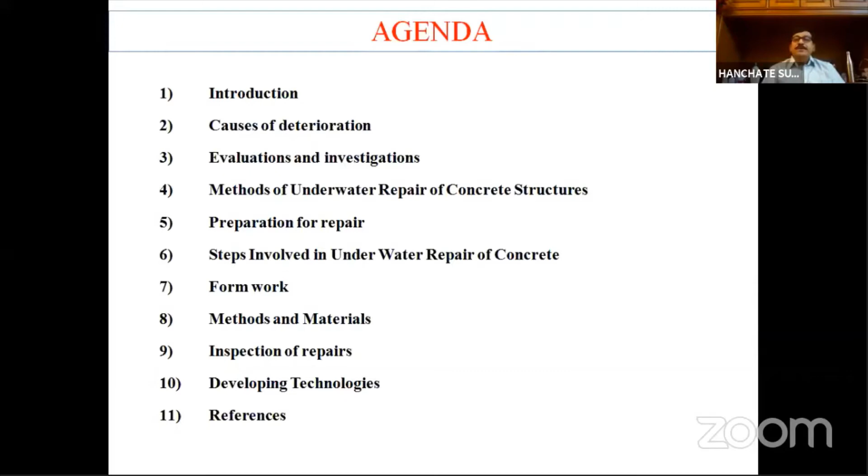So let us first start with the introduction about this topic. Most of the listeners may wonder why I have to take up a repair underwater. Why not we dewater the entire thing and then repair the structure?

Dewatering the entire area, making it dry, and then taking up a repair is practically impossible in many conditions. Probably if you are in a small water body, dewatering may be possible. But if you think of a big river, or a seashore, structures under sea, it will be practically impossible to make dewatering and create dry conditions there.

And this definitely disrupts the project operations and is also very expensive. Dewatering is very expensive. So that's why we don't have any other alternative but to repair the structure underwater.

So the repair of concrete underwater is really a complex problem, a very complex phenomena. Even though the repair procedures and materials are very similar to those required in normal concrete repair, what is important is how you execute the repair underwater, how to plan it, how to identify the problem, and then how to repair the structure. So this poses a really big challenge when it is underwater.

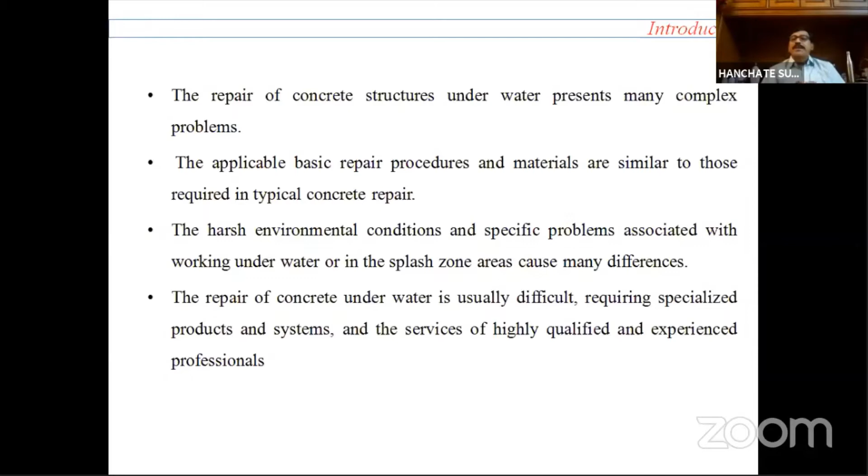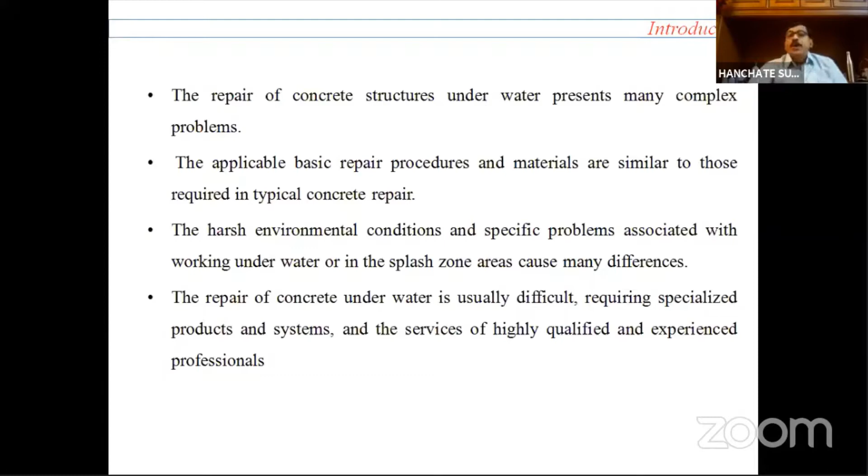Because of harsh environmental conditions and problems associated with working underwater, particularly in the splash zone, they cause many difficulties. You need specialized products, specialized systems, and you also have to use the services of highly qualified and experienced professionals when you want to undertake underwater repair.

Before that, you have to make a proper evaluation of the present condition of the structure. That will be the first step for designing a long-term repair. When you think of a repair underwater, your repair must be long-term, because it's very difficult to conduct the repair underwater. It should not be frequent repairs. Once a repair is done, it should last for a long time. So that's why we have to design a long-term repair.

So in order to make the repair most effective and long lasting, proper evaluation is needed. For proper evaluation, we may need to collect historical information of the structure from the people who were involved in the construction, or by going back to the drawings and designs at the time of execution, and you have to take the periodic on-site inspection reports which are available.

All this we have to do before we actually plan a repair underwater. You have to investigate and prepare comprehensive documentation of the cause and extent of the deterioration that has taken place. You have to come out with a proper repair technique, a quality assurance scheme, and installation procedures that have to be taken care of in resulting a better repair system underwater.

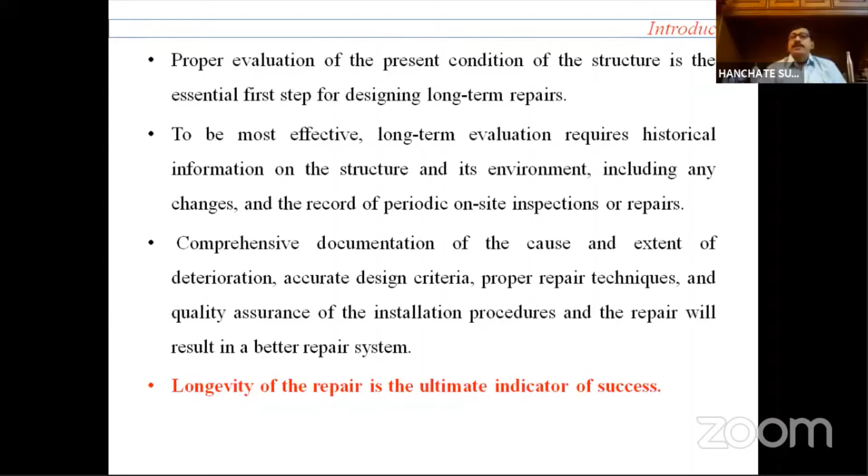So the whole idea is longevity of the repair. That is the ultimate indicator of success. Longevity of the repair is very important. When it is underwater, you should not resort to frequent repairs, as you will see how difficult it is to tackle underwater repair. Particularly, water contains oxygen and certain contaminants that can cause aggressive attack on the concrete.

Underwater repair of concrete is a very specialized and highly technical part of concrete repair technology. That's why I said I would like to discuss this topic today.

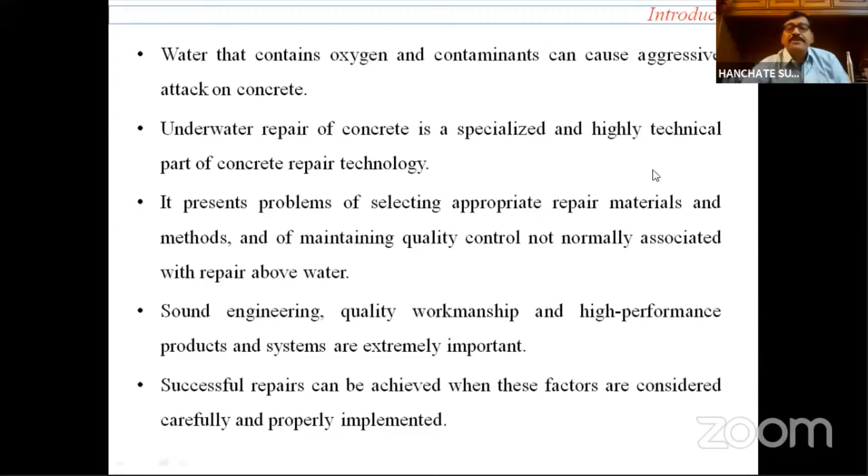You have to select appropriate repair materials and methods and measures of quality control, which are not normally associated with above-water repairs. You need sound engineering, good quality workmanship, and high performance products for repair and systems, which are extremely important when you plan an underwater repair. You need to consider all these factors, and only then will you come up with a good, successful repair underwater.

So before actually proceeding to the repair, let us discuss briefly the environmental conditions that affect deterioration. Water temperature, oxygen content, water pH value, salinity, sulfates - all these cause deterioration of the structures underwater. So water temperature is a very important parameter.

If the temperature rises, it accelerates the chemical reactions and corrosion, so corrosion rates increase when the temperature of the water is higher. Similarly, increased oxygen content creates corrosion. Wave action, turbulence, and water flow rate bring oxygen to the submerged elements. All these factors are involved in deteriorating the structure.

The pH value of the water is very important. If the waters are acidic, having a very low pH value, they accelerate the corrosion of the steel reinforcement, or if you are using a steel structure under the water.

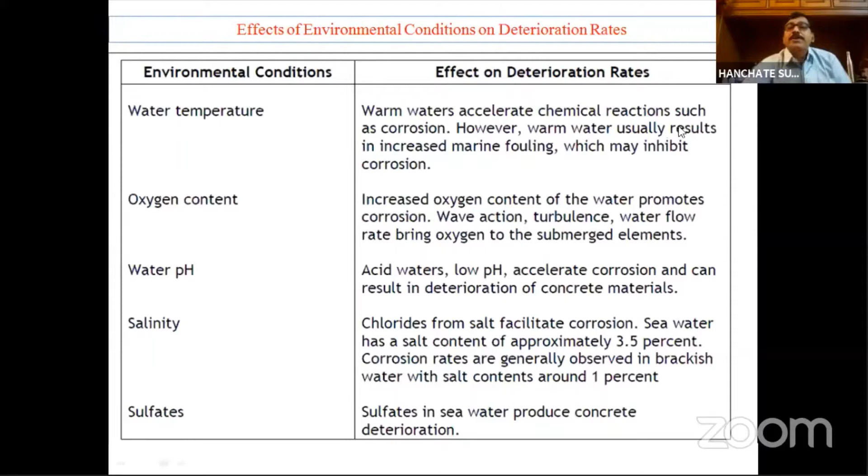Similarly, salinity, the chlorides from the salt, facilitate corrosion. Seawater has about 3.5% salt content, and corrosion rates are generally observed to be very high when salt content is around 1%. So if the salt content is about 3.5%, you can imagine how much corrosion will take place under seawater. Similarly, sulfates are also another very important phenomenon that will assist deterioration underwater.

So when you plan a repair underwater, you need to do evaluation, then carry out the repair, and then inspect the repair. All three things are important: preliminary investigation, that is evaluation and inspection; then carrying out the repair; then inspection of the repair.

Generally when you work above water, once the repair is done, we forget about it and do not inspect it. But underwater, once the repair is completed, inspection of the repair is also very important. So these three steps you have to take when it comes to underwater concrete repair.

So for all these steps, diving technology is used underwater. What is this diving technology, and what are the different types of diving technologies? Basically, we have 3 types of diving technologies used for underwater repair. The first one is manned diving.

In manned diving, a person wears an armored suit capable of resisting 1 atmosphere pressure, and he dives into the water. This is the most simple or commonly used method, manned diving.

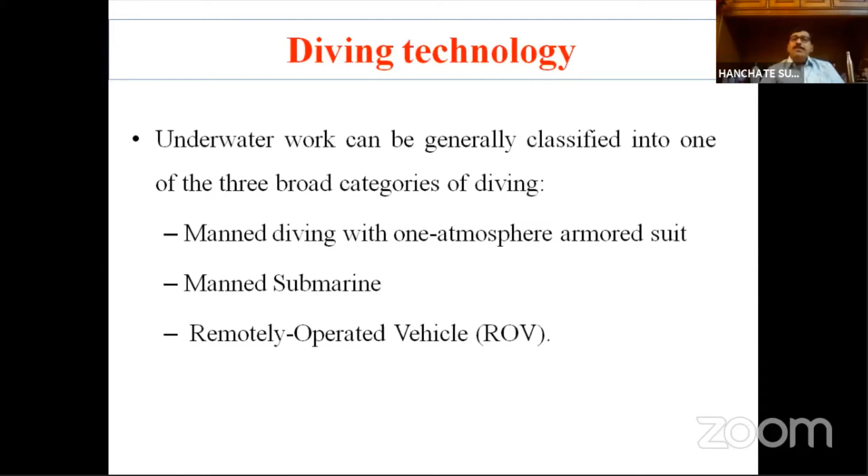The third method is the remotely operated vehicle, ROV. In this case, no person enters the water. An ROV vehicle is sent underwater, and human beings stay on a barge constructed above water, from where they monitor the operation of the ROV. So these are the 3 main technologies used in diving.

You've popularly heard about scuba diving. If you have visited Andaman, Nicobar Islands, or Goa, you would have done scuba diving. What is scuba? Scuba is self-contained underwater breathing apparatus. A person wears the scuba, the self-contained underwater breathing apparatus, then wears the armored suit which resists 1 atmospheric pressure, and dives into the water. This is a popularly used technology, scuba.

When you need to perform duties at pressures more than 1 atmosphere ambient pressure, that causes physiological changes within the human body of the diver. The body tissues absorb and shed gases at different rates than those normally experienced on the surface when underwater. This depends on how deep you are into the water, which directly relates to the pressure of the water.

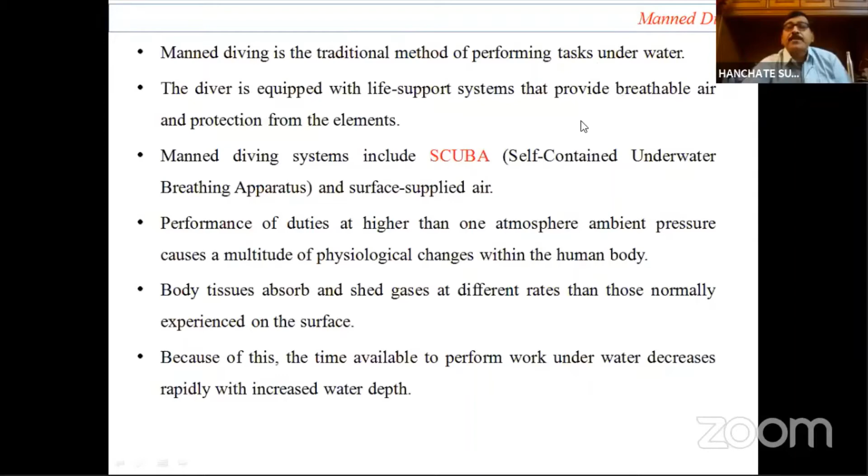Generally, industry standards allow a diver to use compressed air at 30 feet, that is about 10 meters, for an unlimited period of time. So if you are within a depth of 10 meters, you can work for an unlimited period of time.

If the depth is increased to 20 meters, the diver can work only for 60 minutes, that is 1 hour, without taking any special precautions. The upper limit is 30 minutes of work if you are going beyond 30 meters in seawater.

If these limits are exceeded, you need to take precautions to decompress the diver, because decompression takes place as the diver goes deeper and deeper. So the sophistication, and hence the cost involved in the diving systems used on the project, increases with the depth at which you are working. If you are working at greater depths, you need highly sophisticated systems.

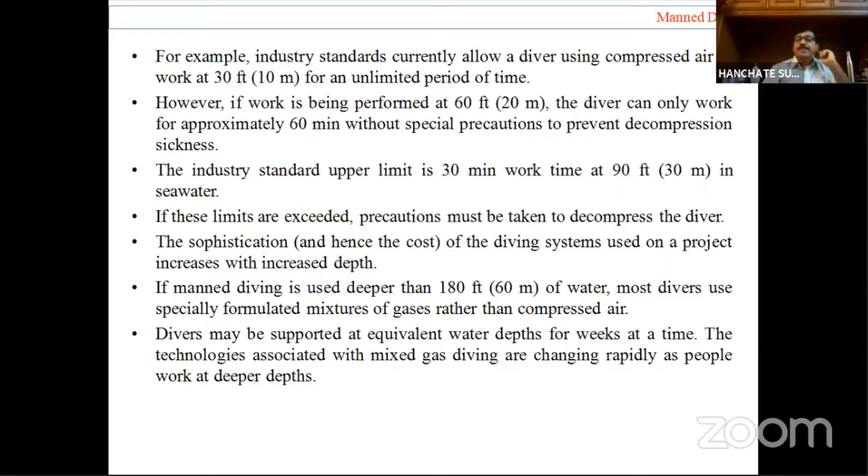If manned diving is used at depths greater than 60 meters below sea level, most divers use specially formulated mixtures of gases rather than compressed air. Generally when you are above 60 meters depth, you use compressed air, but if you are going even deeper than 60 meters, simple compressed air is not going to help, so many divers use a mixture of gases instead.

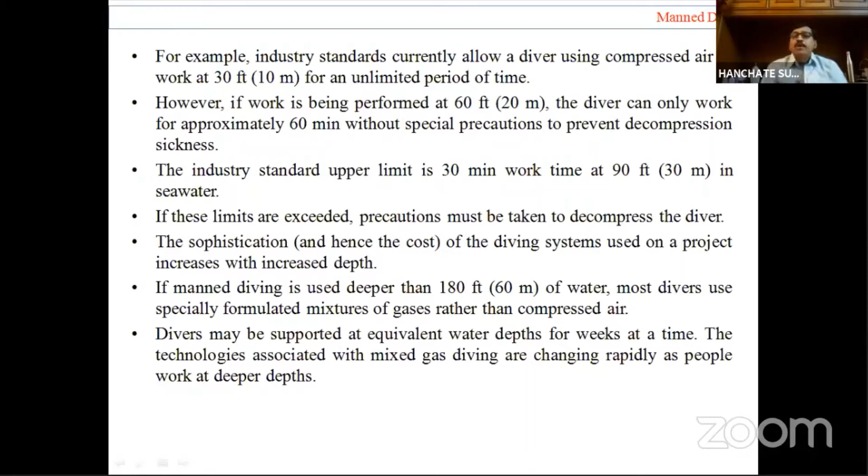The technologies associated with this mixed gas diving are changing rapidly, and more new technologies are coming to facilitate divers to go and work at greater depths.

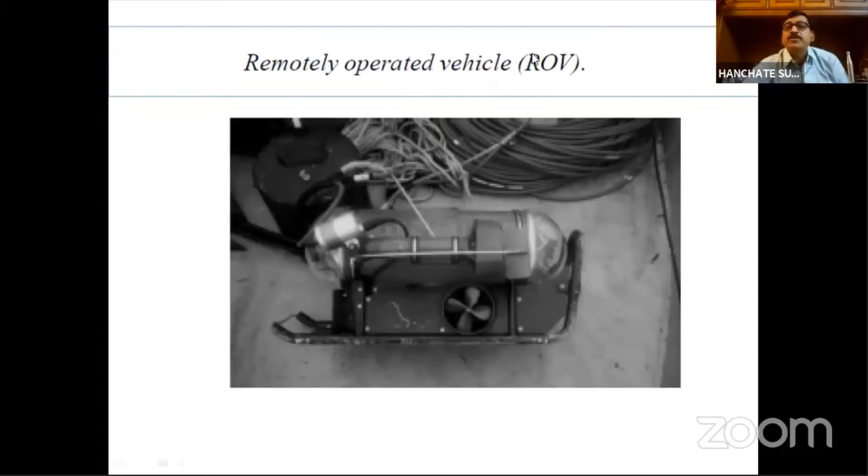Coming to the ROV, the second method, submarine I could not get a picture of, but this ROV I could get a picture here. This is a remotely operated vehicle in which the persons investigating the structure stay on a barge constructed above the water, and this ROV is sent into the water to the required depth. This really avoids many problems involved with human decompression when a human diver goes into the water. So when you are working at very high depths under the sea, the ROV is very much required and used, but it definitely increases the project cost.

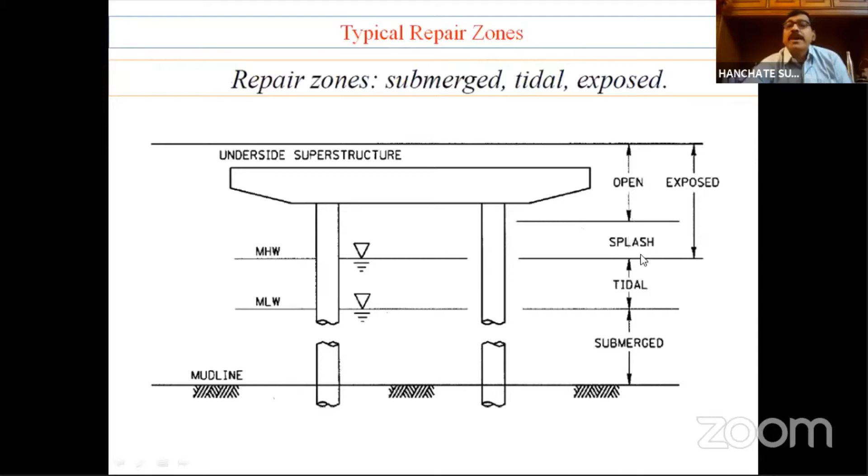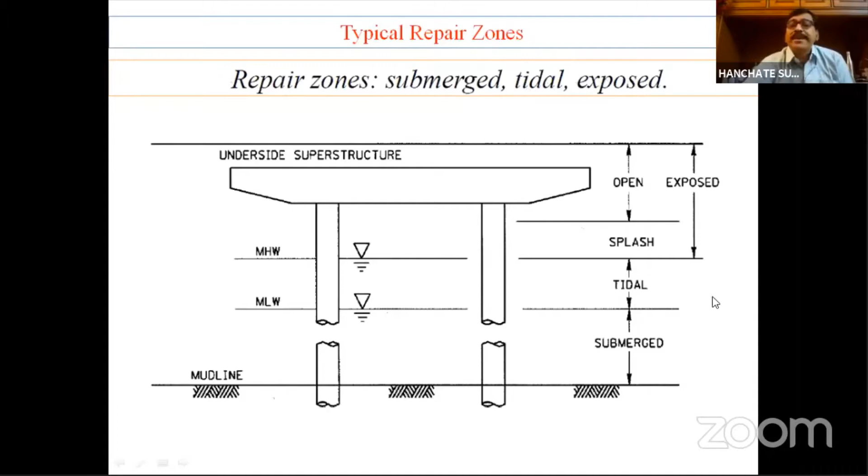You have to understand the typical repair zones that exist underwater. If you see this figure, there are three repair zones: one is the submerged zone, which is totally inside; then the tidal zone, where tidal areas are experienced; and the splash zone. The splash zone plus the open area together are called the exposed zone. So we have three repair zones underwater: submerged zone, tidal zone, and exposed zone. All three areas may require repair depending upon the type of deterioration.

You have to understand what is the cause of deterioration before you take up the repair. The various causes include marine organisms present in the seawater, and deficient construction practices—when the original structure was constructed, there may be a deficiency in construction practice, or errors taking place, or design errors, or mix design errors, among so many other reasons that could cause deterioration.

As already explained, chemical attack, corrosion, and mechanical damage can all take place on structures underwater. Another important damage is freezing and thawing damage. In structures located underwater in very cool zones, there is a possibility that the water freezes, and then when the temperature increases again, it thaws. So there is freezing as well as thawing, creating a continuous cycle that causes damage to the structure, especially in marine conditions.

Out of all these causes, if you look at either concrete structures reinforced with steel or steel structures built with pure steel elements, the most important cause of deterioration is corrosion.

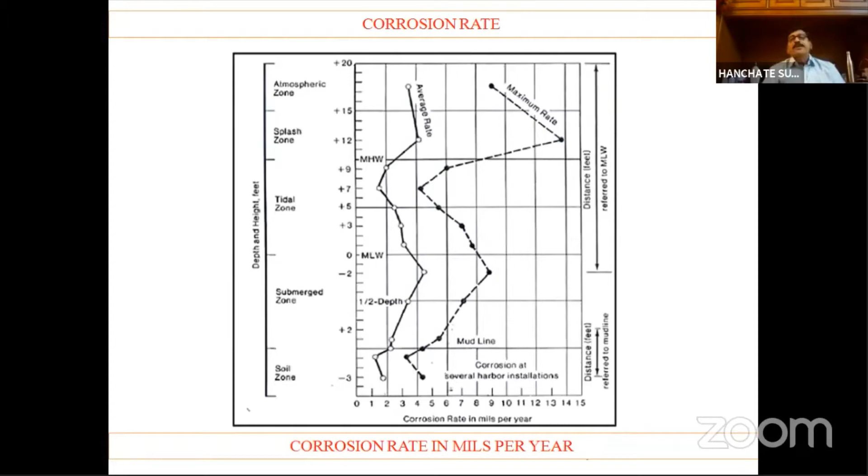So if there is a small crack that has developed in the concrete during the initial construction, that is sufficient for the saline water to enter into the structure and damage the reinforcing bars that are there in the structure. So the corrosion rates are increasing with the age of the structure also.

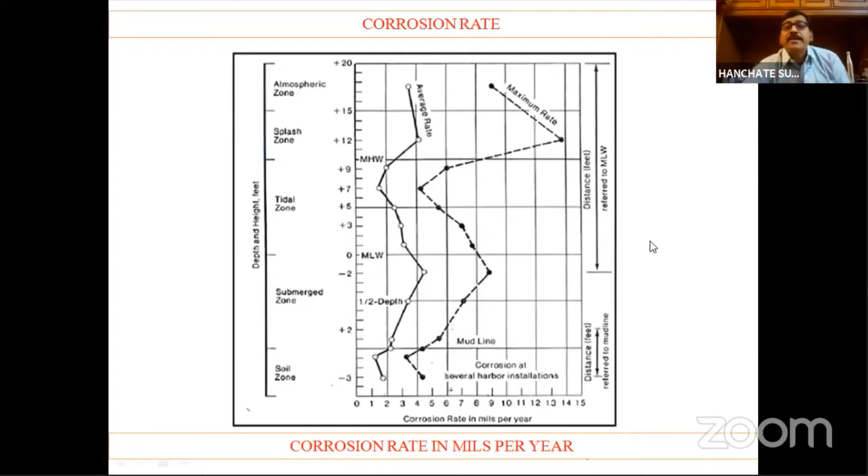So you have to keep these points in mind when you think of a repair underwater. As I said, before you plan a repair, evaluation and investigations are necessary before you proceed with the repair underwater. So what are the evaluations and investigations which you need to take underwater?

So generally, if you are working above water, Professor Kalgal was telling about a visual inspection, or taking a chisel and hammer and chiseling out some sample. So he was telling some of the very small evaluation procedures. But when you come to underwater, going there and chiseling or taking out a material, you need a different technology.

So structural investigations underwater are usually conducted as part of routine preventive maintenance programs. You have to do a preventive maintenance program to avoid deterioration to the structure. And during the initial construction inspection also, you have to conduct the evaluation. As a special examination, when an accident takes place or a catastrophic event takes place, or when you want to plan a repair, you have to do this evaluation and investigations.

So whenever you want to plan a repair, then the first step is going to be evaluation and investigation when it is underwater.

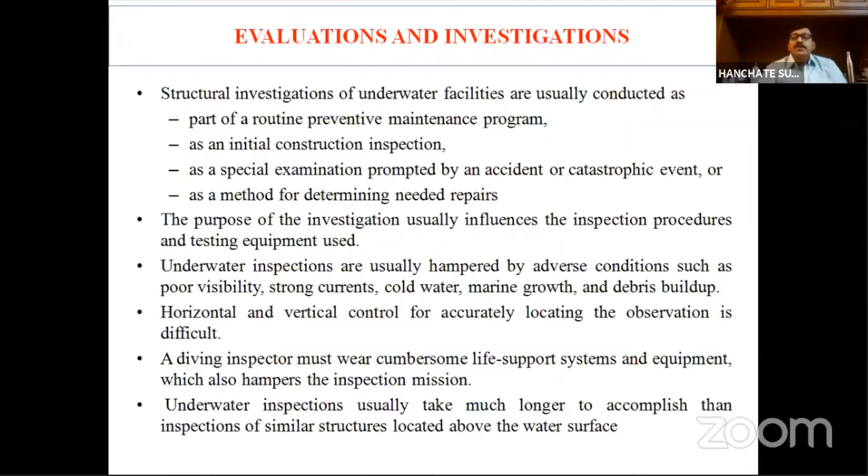And then he has to also carry the equipment required for doing the evaluation and the investigation. So all this the diver has to take along with him. That's why underwater inspections usually take much longer time to accomplish than for similar structures located above the water.

So the primary goal in all these investigations is to inspect the structural elements to detect any obvious damage that has taken place. If the defect is observed, then the inspector identifies the type and extent of the defect to determine how serious the problem may be.

If the defect is very small, sometimes you can wait for the defect to become more, or if you observe that the defect is not going to create any further damage, then you can forget about the defect. So no repair need to be planned. Or if necessary, an inspection team can also reinvestigate the particular damaged area.

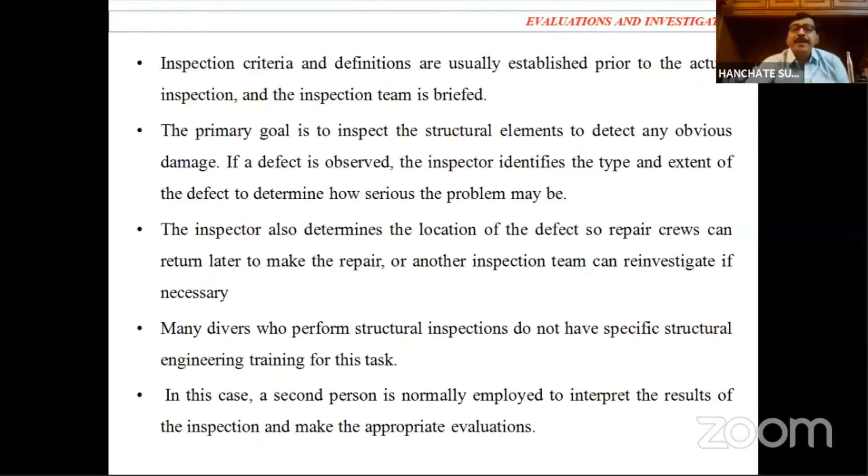But unfortunately, what happens is the divers who are going into the water are not structural engineers, and they don't have much knowledge about the structural engineering problems that the concrete is experiencing, the deterioration problems. So whatever evaluation the divers are giving, interpretation of this evaluation by structural engineers at the surface is very, very important, and you have to do proper evaluation of the information provided by the diver from the bottom of the water, underwater.

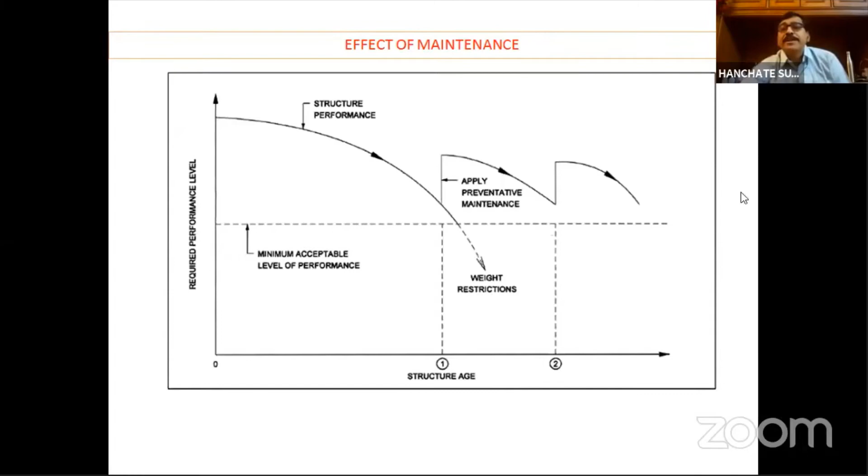So when it comes to underwater, that is why the advice is prevention. Prevention is better than cure. So when it becomes underwater, it is very important. You have to stress more on that, because proper maintenance of underwater structures will reduce the need of repair, and the structural performance will be more.

So then, how to plan the investigation underwater? Once you decide about the scope of the investigation, then you have to plan about the mission of conducting this inspection underwater. Generally, they conduct a pre-inspection meeting to identify what type of equipment they have to use underwater and what type of techniques they have to use. In addition, what type of documentation you have to do. Whatever evaluations you are doing, the documentation is very important. So the information that is sent from below water to the surface has to be documented properly for further analysis.

So inspection notes typically consist of a diving log with the notations of specific features, and these are generally transcribed from a slate which is used by a diver. The diver is using a slate, or a worksheet. It takes the form of a worksheet. The information passed on by the diver to the surface, the worksheet, will be filled up by people who are sitting above the surface.

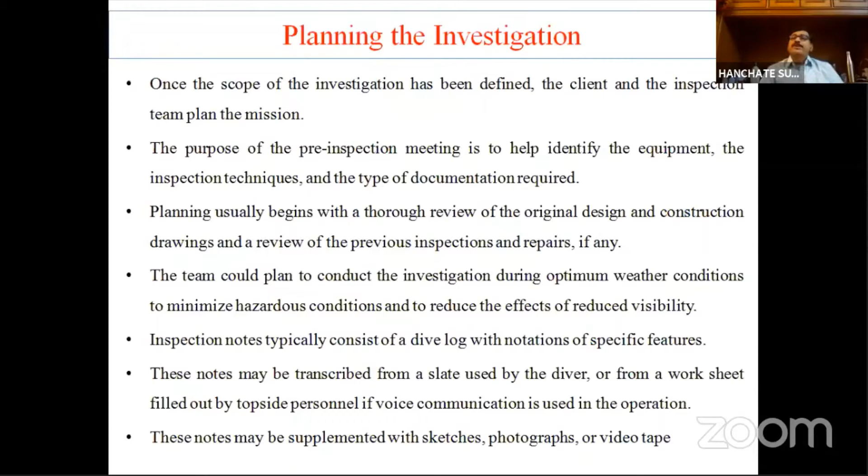If necessary, these are to be supplemented with proper sketches, photographs, and also videotapes. The diver can take video equipment, specialized video equipment which will be used underwater, a specialized camera to take up photographs underwater. So those are to be passed on to proper documentation by structural engineers who are staying above the surface.

So as I said, evaluation of the findings is very important. This is another very important topic when it comes to underwater. So whatever information is passed on from the diver is to be evaluated by people who are staying at the surface. This is a very difficult task. What is the idea of the diver? You have to properly understand whatever documentation he has sent and evaluate to find out the effect, or to find out the exact damage that has taken place.

So here, the skill of the diver or inspector is very much essential for the evaluation process to be really meaningful. Generally, it is the responsibility of the diver to qualify and quantify the condition of the defect, because he is the person who has gone inside. He has to quantify the amount of the defect that has taken place underwater. So the evaluator also has to judge whether the defect will continue to degrade the structure or if the problem has stabilized. This is very important, because it can avoid a complete repair program. A complete repair program can be avoided if you decide the problem has already stabilized and there is no need of a repair. So these are things the evaluators have to do.

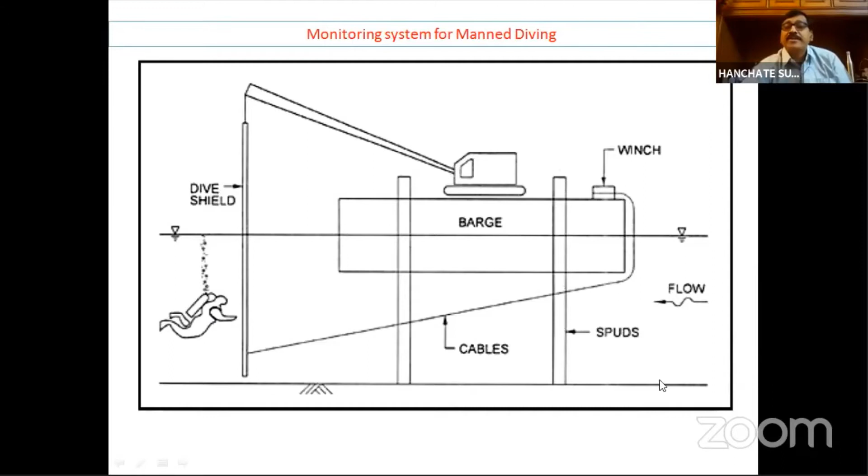So this is a typical monitoring system for manned diving. You can see this is a diver here, and this is the diving shield which is protecting the diver from going into this zone. This is a barge constructed above water. Here you have the computer or receiving system, which are connected by cables. So from here, whatever information is sent by the diver will be brought above the barge into this recording system. This is a typical monitoring system used in manned diving.

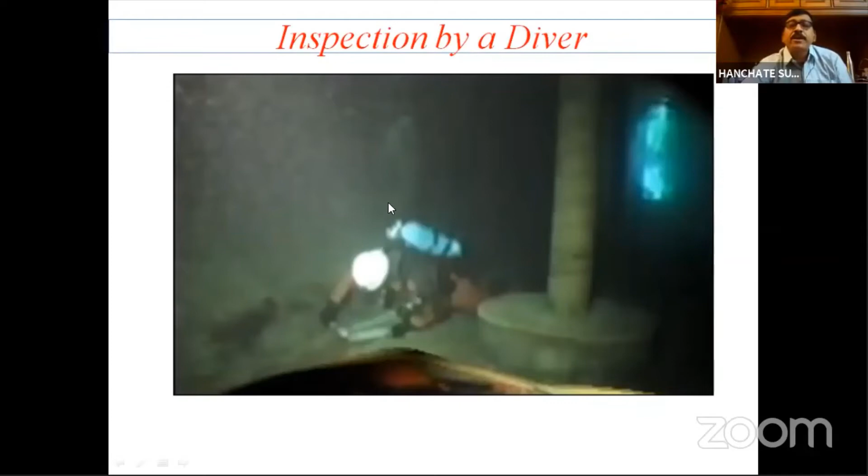So here you can see the inspection being carried out by a diver. You can see a diver has gone underwater with the scuba system and the armored suit. So he is able to reach and he is inspecting the structure. The pictures you can't get very good clarity underwater. That's why you can't get very good quality pictures. The clarity is definitely to be compromised.

Once the evaluations are done, once the underwater inspection is carried out, then you have to decide about what actions to be taken care of, and which is the appropriate action to take after a defect has been identified.

This involves considering the potential hazard of the defect on the structure, the risk of continued structural deterioration because of this defect identified by a diver, what technology is available to repair it, and the cost associated with taking up that repair.

You also estimate the remaining life of the structure. If the remaining life is very small, there is no meaning in planning a repair and spending money on it. But if the remaining life is much more, then you have to definitely plan for the repair.

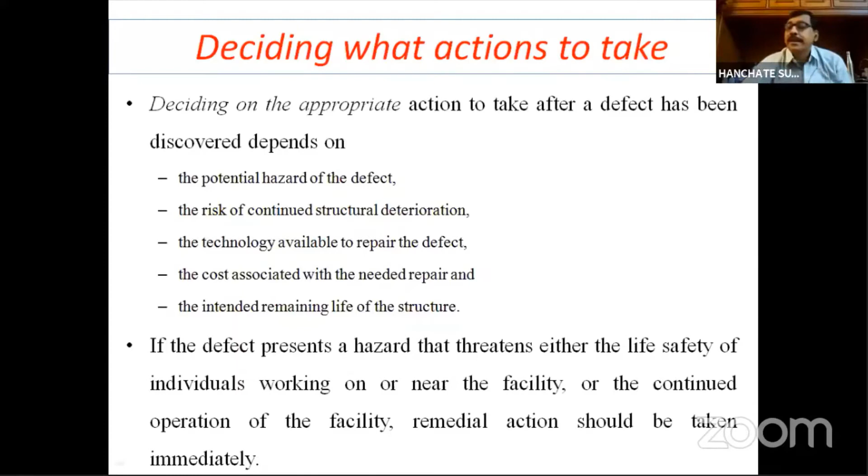But if the defect presents a hazard that threatens the life safety of individuals working nearby, or can disrupt the operation of the facility, then remedial action should be taken immediately, since the defect can cause loss of life or complete discontinuity of the structure's purpose. In both these cases, repair must be taken up immediately.

To locate distress, visual inspection using eyesight is common. In above-water structures, generally a professional structural engineer or expert will visit the structure and visually inspect it with the help of a small chisel or hammer, along with photographs or videographs.

But when it comes to underwater inspection, visual inspection is very difficult because visibility is very poor, and you have to carry a wide variety of hand tools, specially prepared for that purpose.

You have to measure the defect. The physical measurements of the defect are taken by visual scaling, generally using hand rulers, thumbs or fingers, hand spans, body lengths, and sometimes depth gauges or thickness gauges in visual inspections.

Visual inspections provide key information for writing the report on the type of damage that has taken place. Sometimes videotape or photographic documentation is also possible in visual inspection.

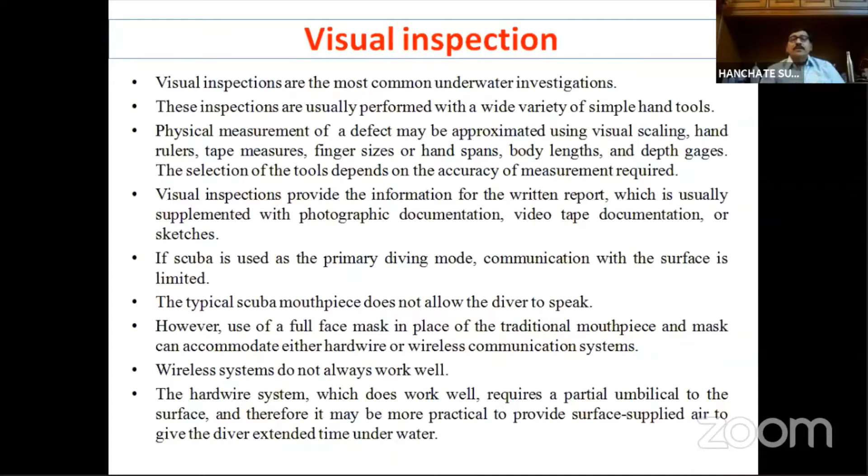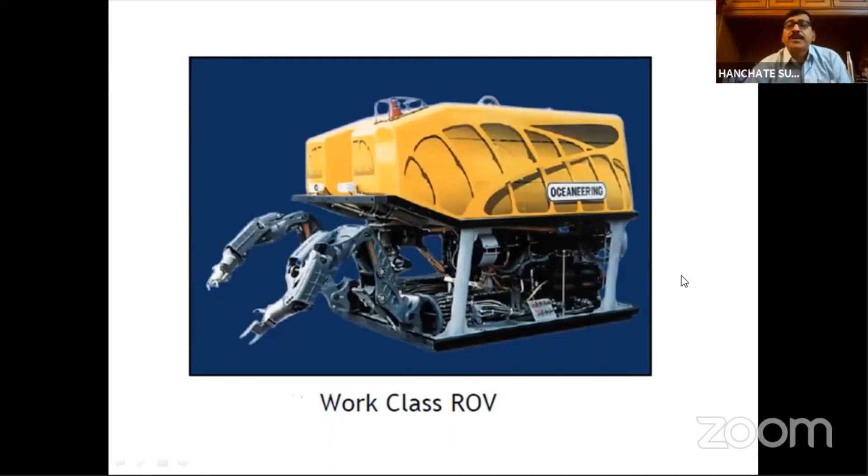With this we get proper documentation for visual inspection. The second type of inspection is tactile inspection, which means inspecting the structure by touching it with hand.

This is again very difficult when it comes to underwater conditions. Tactile inspections are perhaps the most difficult underwater. Tactile inspection above water is very easy, but not so when it goes underwater, usually conducted under conditions of extremely poor visibility.

If you can't conduct a visual inspection because of poor visibility, you have to go for tactile inspection underwater. Examples are a settling pond or a very heavily silted river, where there is no visibility below water, so in such cases you have to use tactile inspection.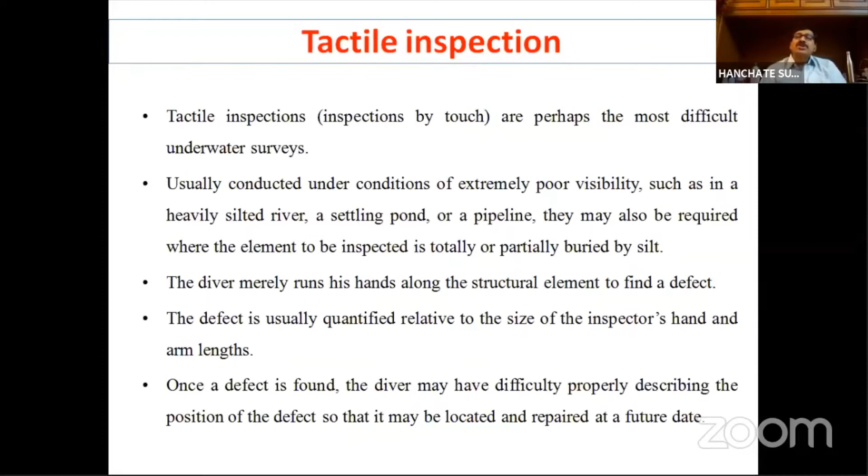To use tactile inspection, you need a proper diving system on hand to reach the structure safely. Once you find a defect through tactile inspection, you should be able to describe it to the structural engineers sitting on top and give them the correct idea of the defect.

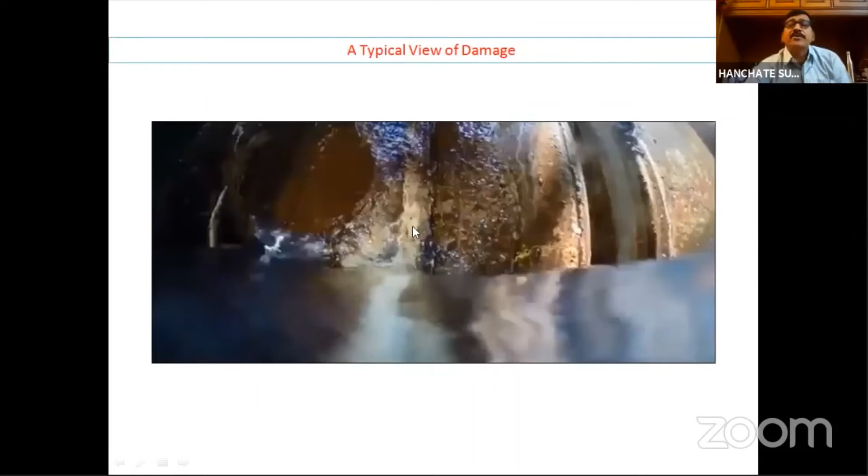Here you can see divers going for tactile inspection using some hand wrenches, trying to inspect a structure by tactile inspection. This is a typical view of the damage that can take place underwater, showing the type of damage occurring.

Then we have magnetic reinforcing bar locators to see how many reinforcement bars are there in the structure. This magnetic mapping can find out how many bars are there and what is the spacing of the bars. This can be determined with the magnetic reinforcing bar locator.

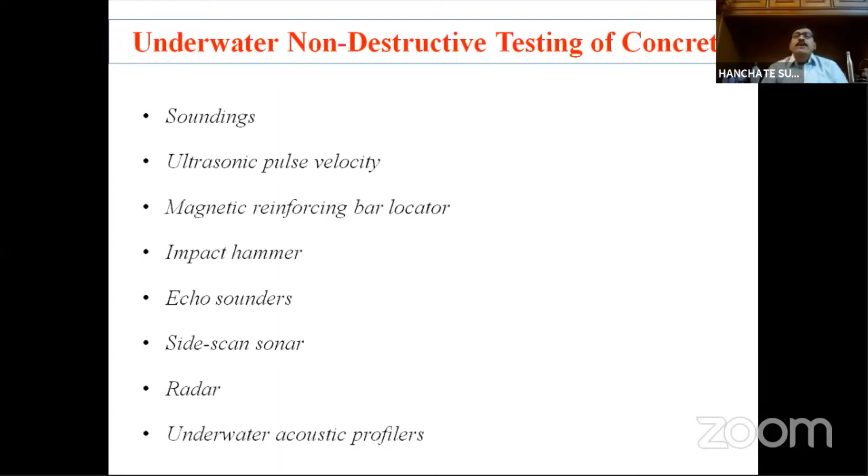Similarly, the impact hammer works on the principle of giving an impact on the structure. Echo sounders send a sound wave frequency to the structure and receive the sound wave coming back. With frequency analysis, the type and amount of damage in the structure can be identified using echo sounders. There are also sonar systems, radars, and acoustic profilers, all available for non-destructive testing of concrete underwater.

I'm not going to discuss more about all these equipment in detail. I just want to tell you that non-destructive testing equipment is available even for underwater testing.

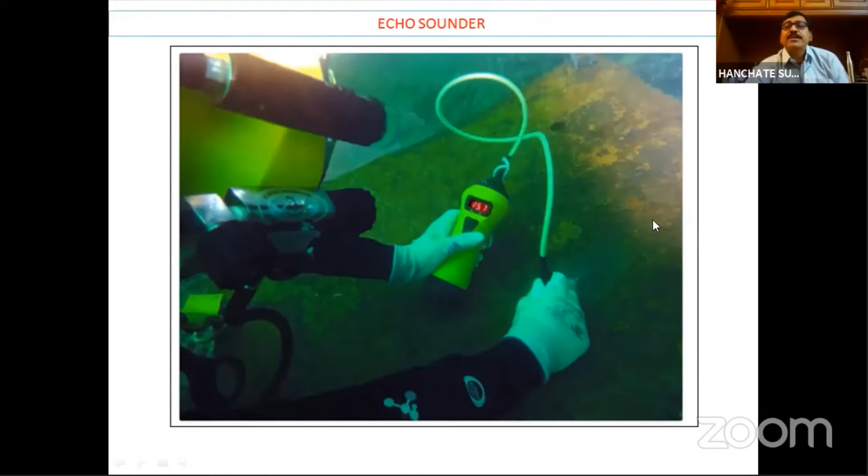So this is a typical echo sounder here, passing sound wave frequency to the structure and receiving the frequency that comes back from the structure. This is a typical thickness gauge used underwater to measure the thickness of the structure. After deterioration, the thickness or the flaw thickness can be measured with this particular thickness gauge.

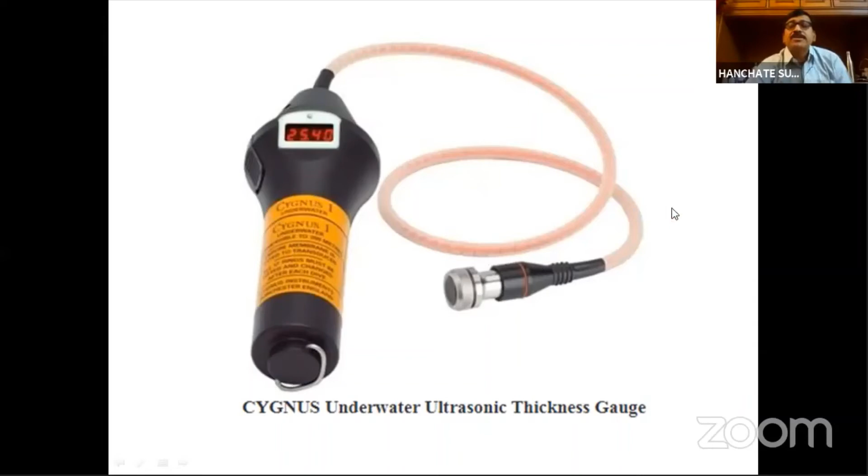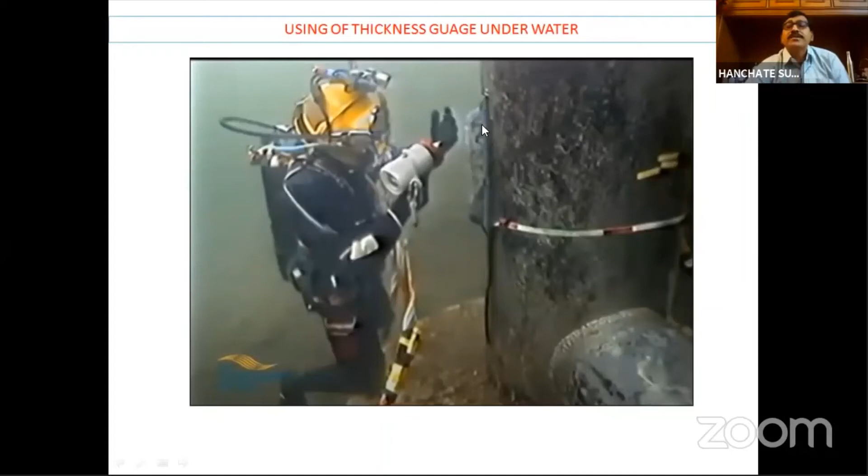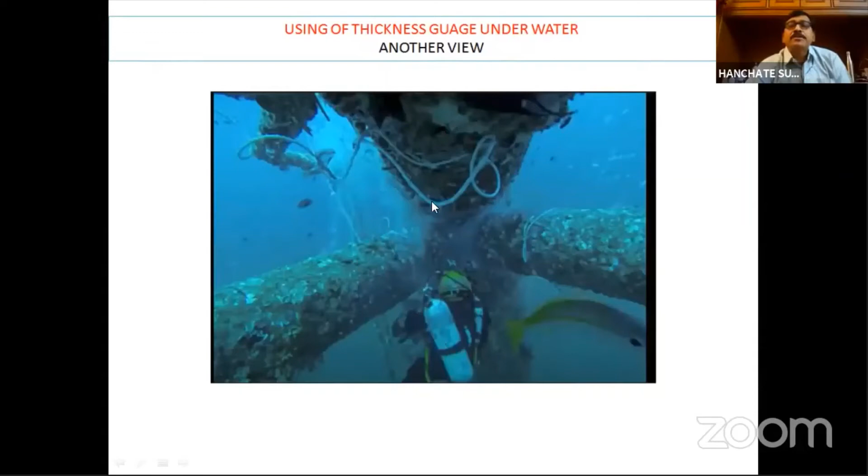Here you can see a diver using the thickness gauge to measure the thickness of the defect underwater. This is a typical photograph, and another view of the same photograph showing the diver trying to measure the thickness of the damage taking place. It's really difficult to do this operation. It depends a lot on the skill of the diver and his knowledge about the defect system, which is very important underwater.

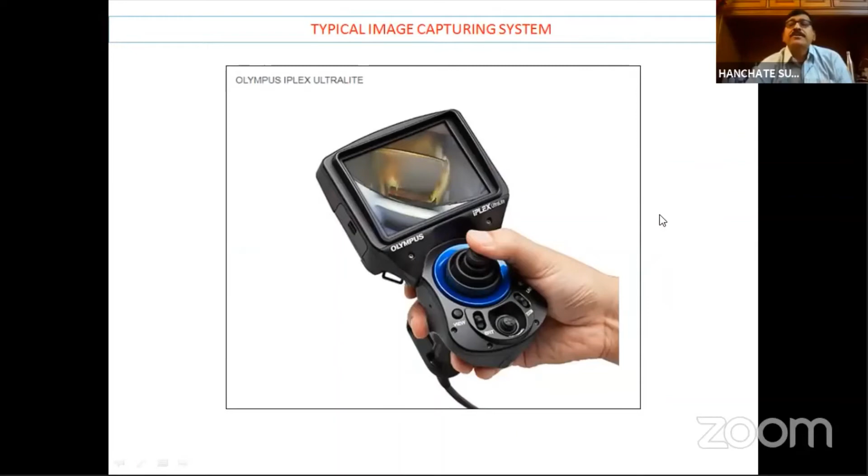Sampling and destructive testing can also be conducted underwater, just like above the water surface. For sampling, you have to collect cores from the structure, and then the cores can be tested. The cores should be brought above the water and tested in the laboratory.

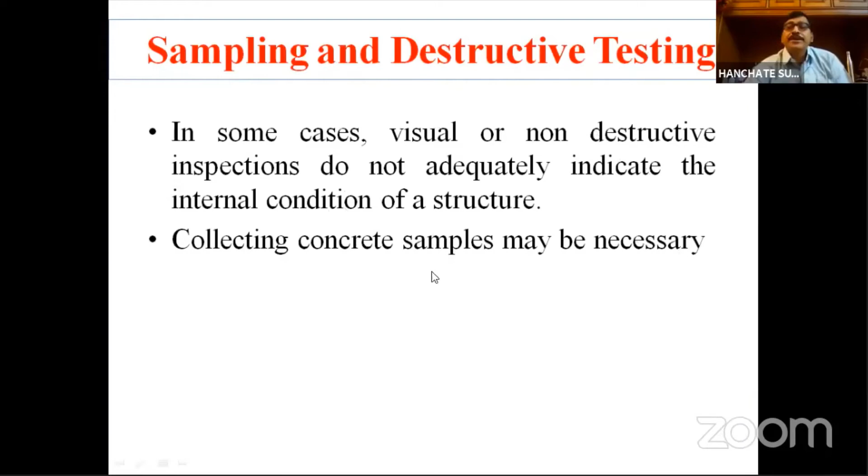When visual or tactile inspections or non-destructive testing are not able to adequately indicate the internal condition of the structure, only then do we proceed to destructive testing or collecting cores. As far as possible, if NDT or visual inspection provide good indication, we need to avoid destructive testing or sampling from underwater.

Collecting cores is one of the very popular methods for sampling even underwater. The type of drilling equipment you have to use is different from what we use in above-water conditions, so we need specialized drilling equipment to cut the core from underwater concrete samples.

Drill base plates are to be suitably bolted to the structure underwater. Before you start drilling, you have to fix the bolt, fixing the base plate with the help of good bolts to the structure against which you are going to take out the core, then you go cut the core.

A diver-operated core cutting apparatus cuts cores up to almost a depth of 1.2 meters or 4 feet, and diameters of about 6 inches, that is 150 mm diameter. So these types of cores are generally used.

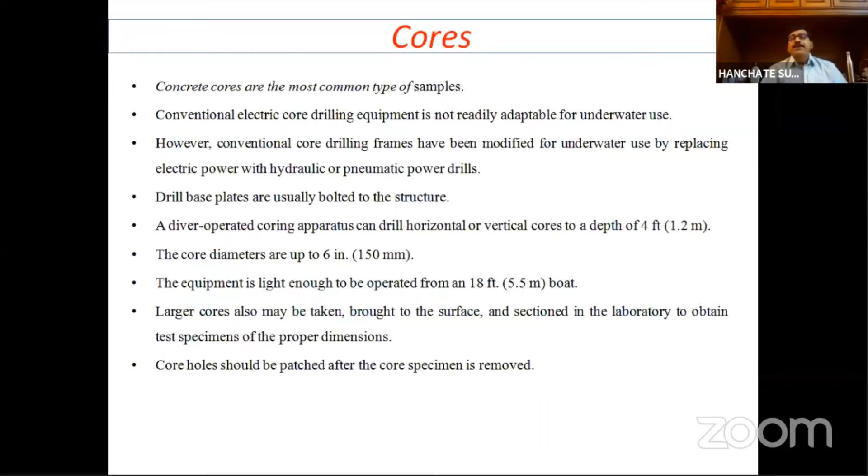What's important is that the core cutting equipment should be light enough to be operated by boat from 18 feet height. It should not be very heavy, otherwise the boat will get submerged again, so that care you have to take.

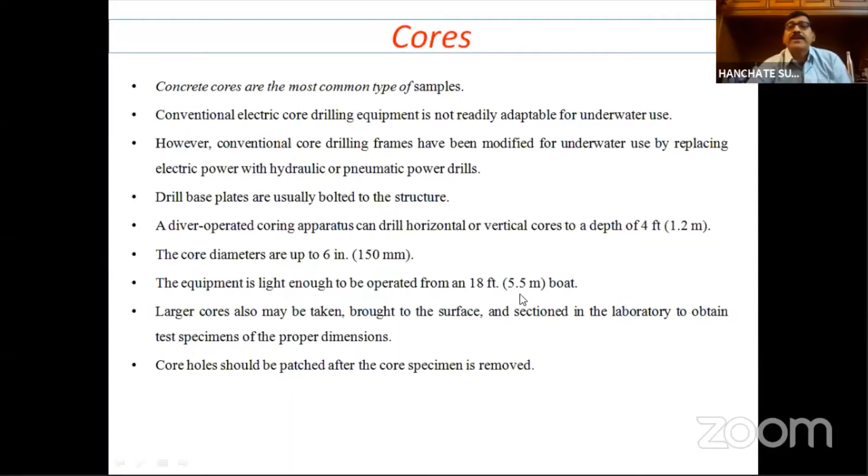If necessary, larger cores can also be taken and the specimens tested in the laboratory. But as far as possible, try to limit your core diameters up to 6 inches so that the weight of the core drilling machine is less and can be carried easily.

Pneumatic or hydraulic saws and chipping hammers are also available to take out samples in addition to core cutting. Samples of the reinforcing bar are also taken out by cutting the bars with pneumatic or hydraulic saw cutters, or sometimes diamond blades are used to cut the reinforcement. These can be cut and brought above sea level and tested in the laboratory.

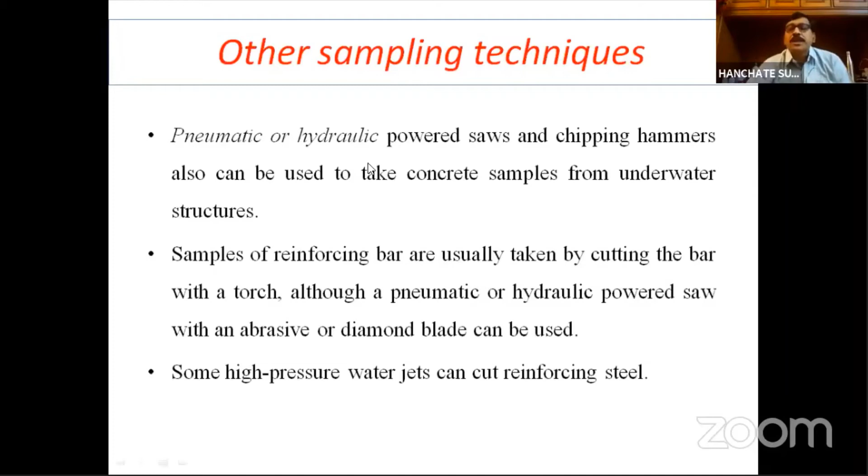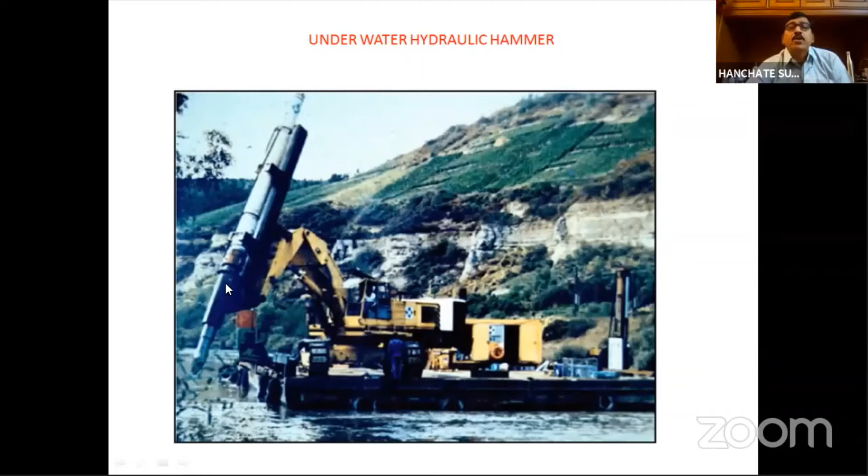Sometimes high pressure water jets are also used to cut the reinforcing steel in an underwater structure. Here you can see a typical hydraulic hammer, resting on the platform or barge on which the entire equipment is mounted, used to collect the core sample from underwater construction.

Once you take out the cores, once you've done the evaluation, and once you have identified the damage and the type of repair needed, you have to decide about the type of repair and then prepare for carrying out the repair underwater.

The first step is concrete removal on the surface. You have to remove the loose, damaged, or deteriorated concrete that is there.

Generally we use high pressure water jets, or pneumatic or hydraulic powered chipping hammers, or hydraulic powered saws. If it is damaged reinforcement, we have to cut with hydraulic powered saws. These are generally the equipment used to prepare for removal of the concrete.

Then we also have to do surface preparation. Once the concrete is removed, the surface needs to be prepared before repair. For that we again use high pressure water jets, or abrasive blasting, or mechanical scrubbers are also available to prepare the surface.

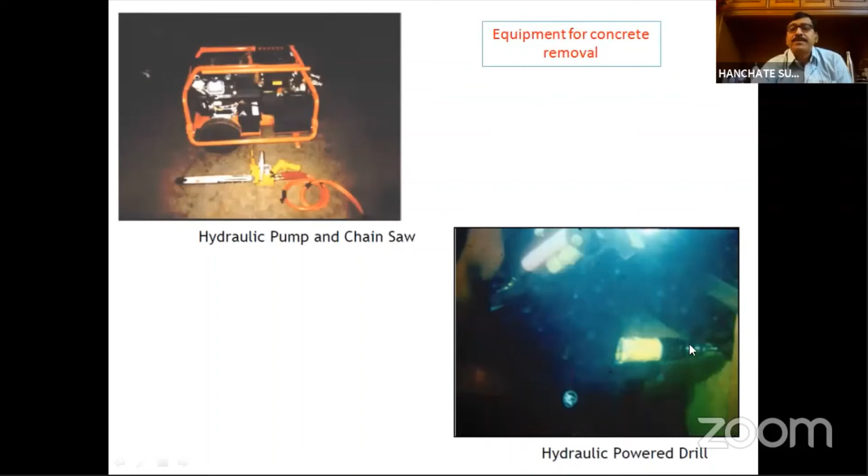This is a hydraulic pump and chainsaw used to remove damaged concrete. Here is another powered drill, a hydraulic powered drill, used to remove concrete or damaged concrete.

Here you can see a chainsaw, the hydraulic chainsaw, which is used to cut the damaged steel reinforcement. And here is a hydraulic powered hammer drill being used by a diver to remove the loose concrete.

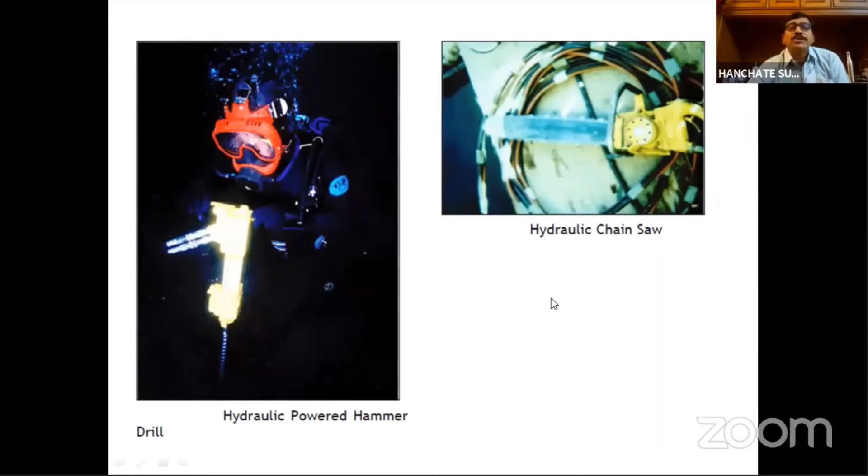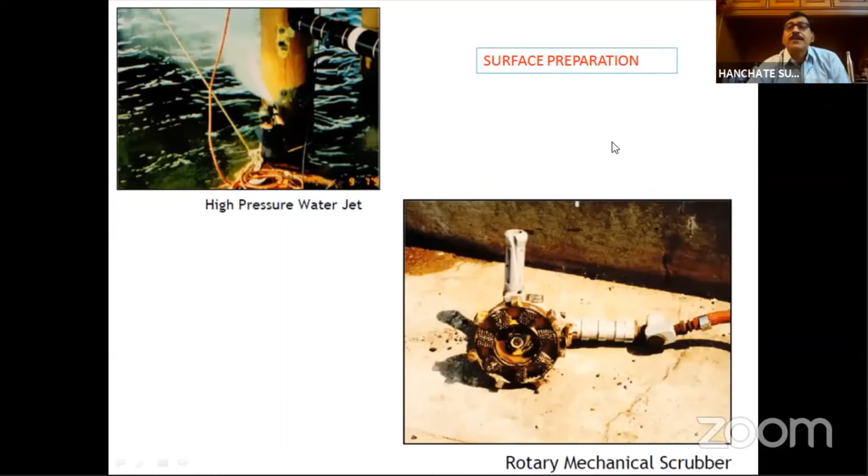Here it is a mechanical scrubber. You can see the scrubbing equipment, these are the brushes, scrubbing brushes. This is a mechanical rotary scrubber, which is also used for surface preparation for underwater structures.

Now coming to steps involved in underwater repair of concrete, there are three steps you have to take up. In majority of the systems, we use the pre-placed aggregate concrete system, which uses a three step sequence.

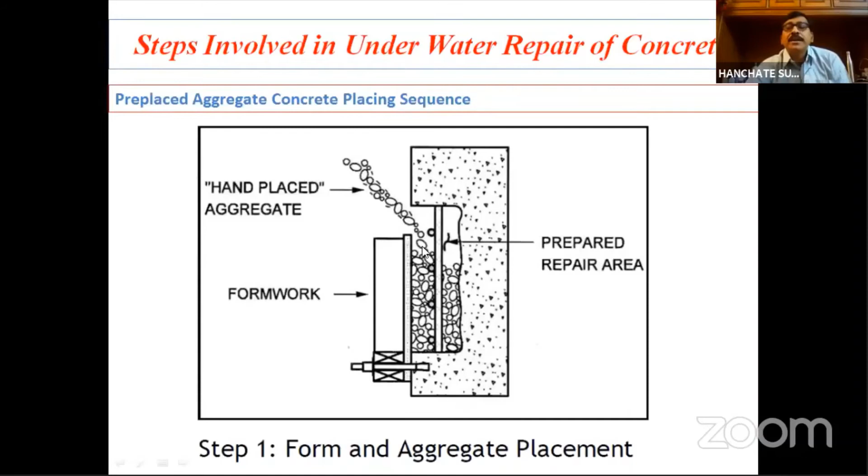For this, we prepare a formwork here, which is a supporting structure. Then hand placed aggregate is poured into this area. So this is the first step: formwork and aggregate placement.

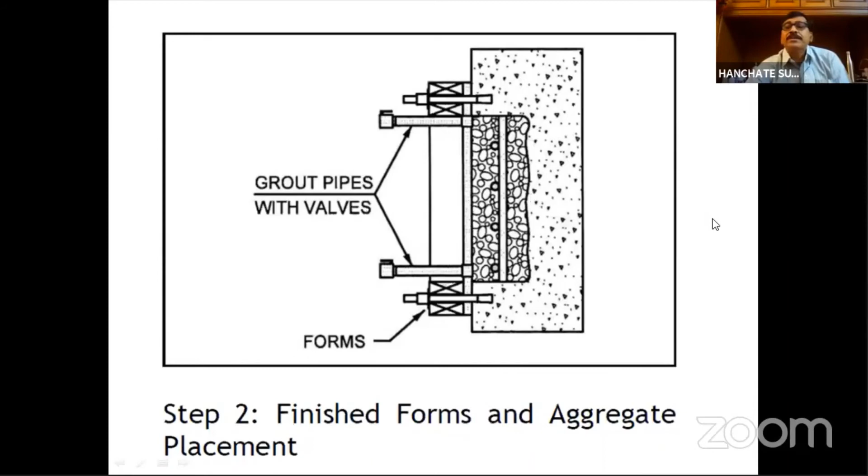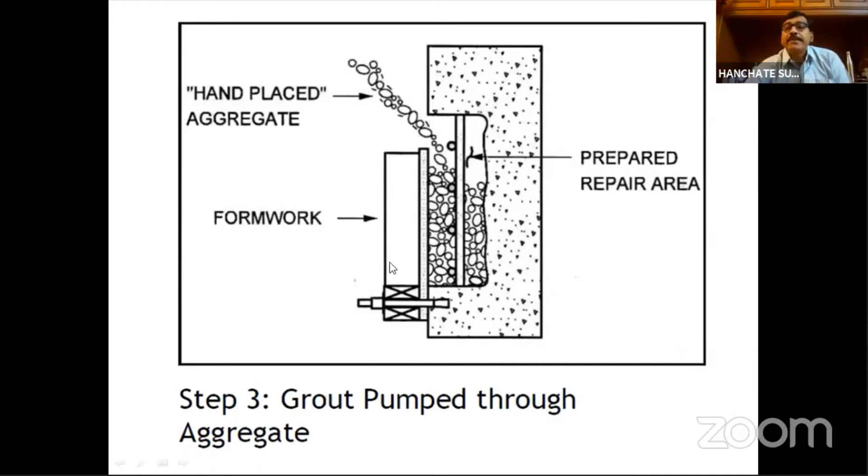And the third step is pumping the grout through the aggregate. So the cement grout is pumped through the aggregate, and this completes the repair for this damaged zone. These are the three steps which are used in underwater concrete repair.

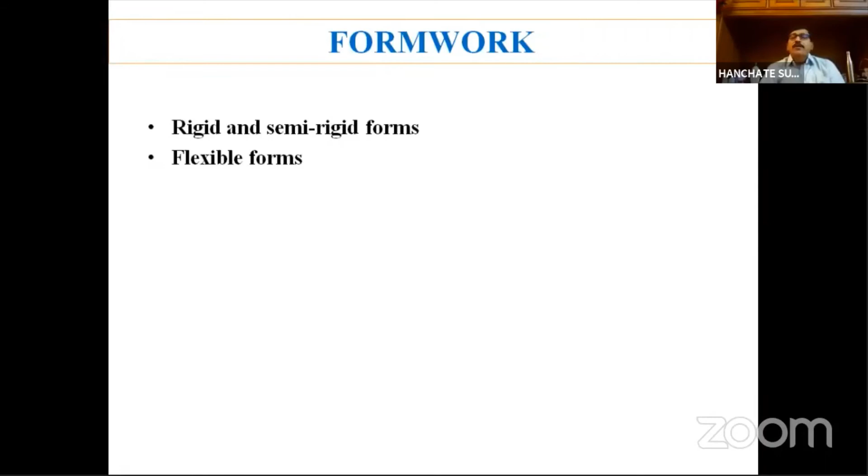When we said formwork, we have two types available: rigid and semi-rigid formworks, or flexible formworks. A rigid form is built with steel bars. Rigid forms with proper stiffness are built with rigid bars, so they support the structure.

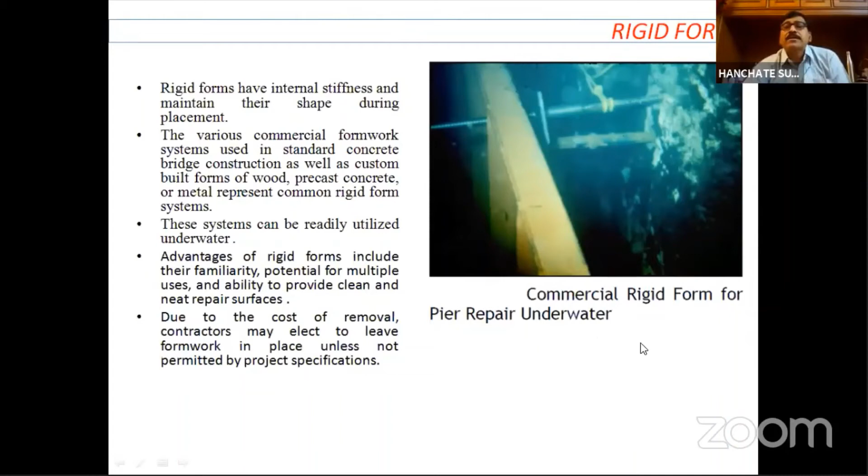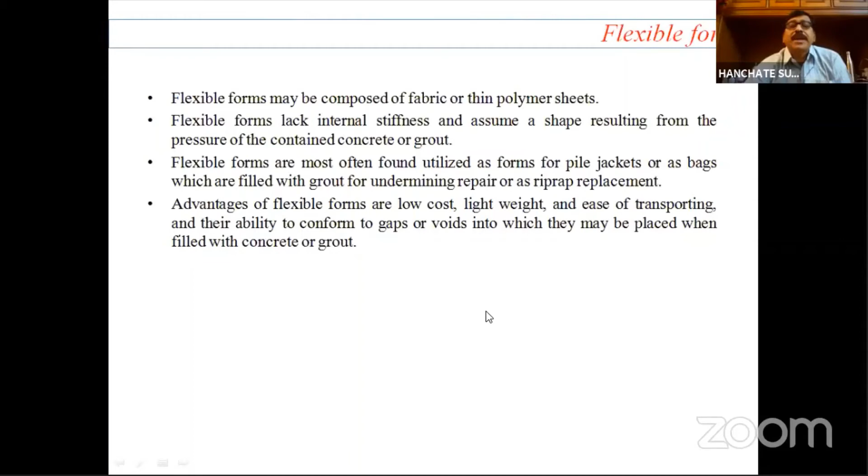But sometimes we also use flexible forms, which are fabric or thin polymer sheets, and these are use and throw types. Sometimes people also prefer to use flexible forms in terms of fabric or polymer sheets, which will reduce the cost, and also they are lightweight and easy to transport to the structure below water. So sometimes even these flexible forms are also very much useful.

So what are the various methods and materials that are available for underwater repair of concrete? Your objective, the design objective, really dictates the type of repair used in the project. So that's what you have to first identify. If it is a minor spall or a crack, a simple surface patch or a crack injection may be adequate. If the crack is very small, simple crack injection is sufficient for providing protection to the reinforcing steel.

For major damage, where the load carrying capacity of the structural element is compromised, the repair may be to re-establish the strength of the original element, or perhaps even to establish a new load path around the damaged area. That depends upon the severity of the damage. If it's small damage, you go ahead with a crack injection system; if it's big damage, you have to reinforce to improve the load carrying capacity of the structural system.

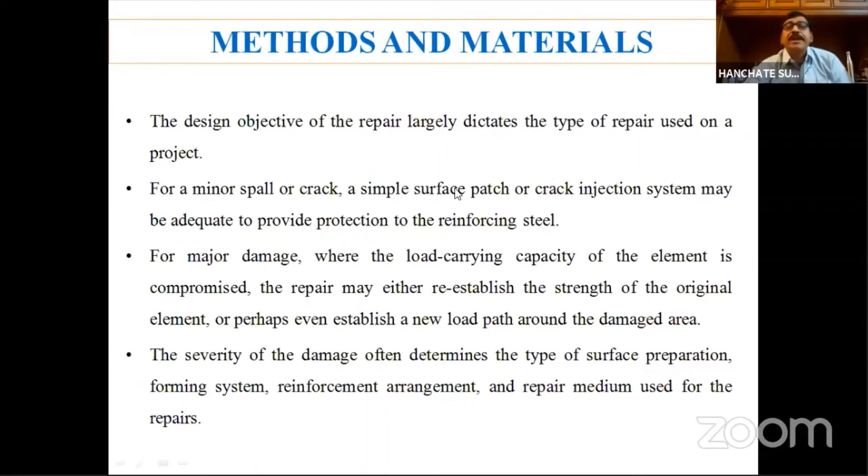So the severity of the damage determines what type of surface preparation you have to do, what type of forming system you have to use, what reinforcement arrangement you have to do, and the type of repair material you have to use.

So the materials which are generally available for underwater repairs are pre-placed aggregate concrete, where aggregate is placed first and then it is grouted. Then pumped concrete and grout, where the concrete is pumped into the defective area through hydraulic pumps. Free dump through water is another method which is used. And most popularly used are epoxy grouting and epoxy injection.

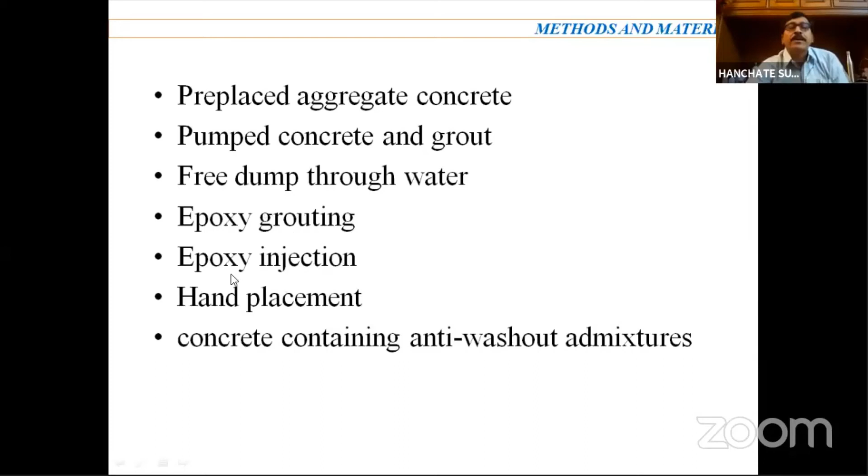Epoxy grouting and epoxy injection are the two very popularly used repair methods underwater, very similar to epoxy grouting above water. Injection or grouting systems are used to inject the epoxy mix into the damaged area, similar to what was discussed for structures above surface level. The only difference is you have to carry the grouting or injection equipment below the water, so it should be made as lightweight as possible.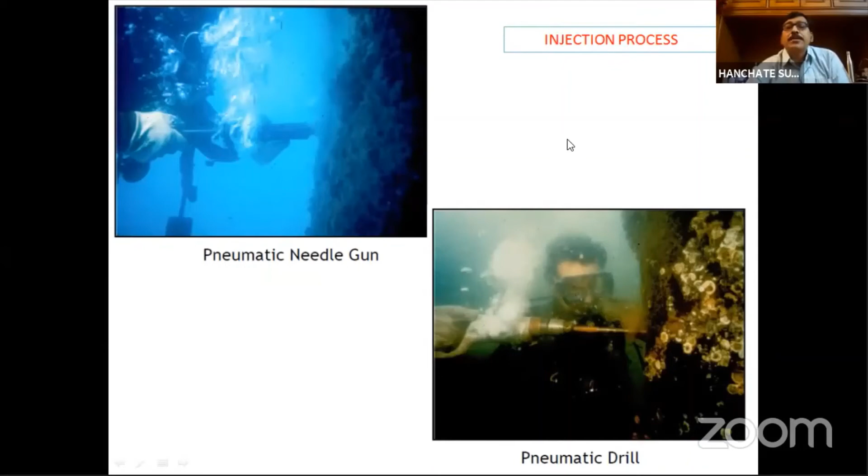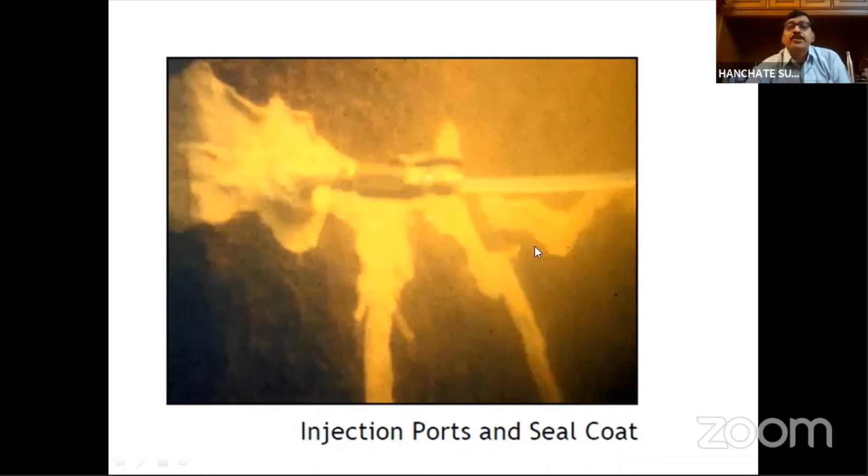Here you can see the injection ports and seal coat. Once the injections are made with the help of a gun, a seal coat is provided on top. This is how the seal coat appears. This is the injection of resin through the port.

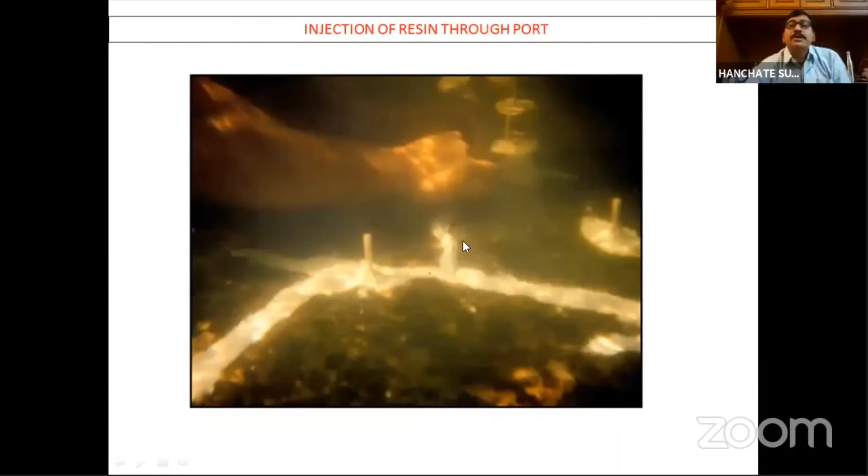So I have to hurry up. I think the time is going to be finished.

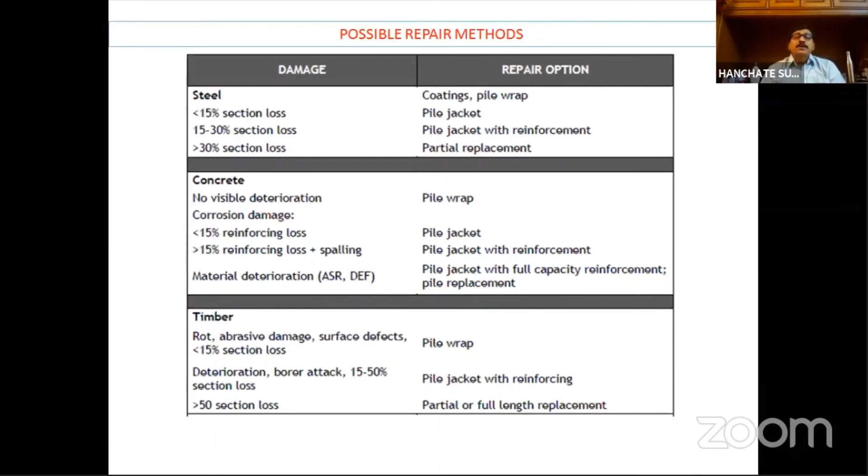These are different possible repair methods I am suggesting for the type of damage, indicating what type of repair you have to use. It's very self-explanatory, so please just look at the type of repair you have to adopt for the type of damage that has occurred. Here you can see pile repair using splice plates.

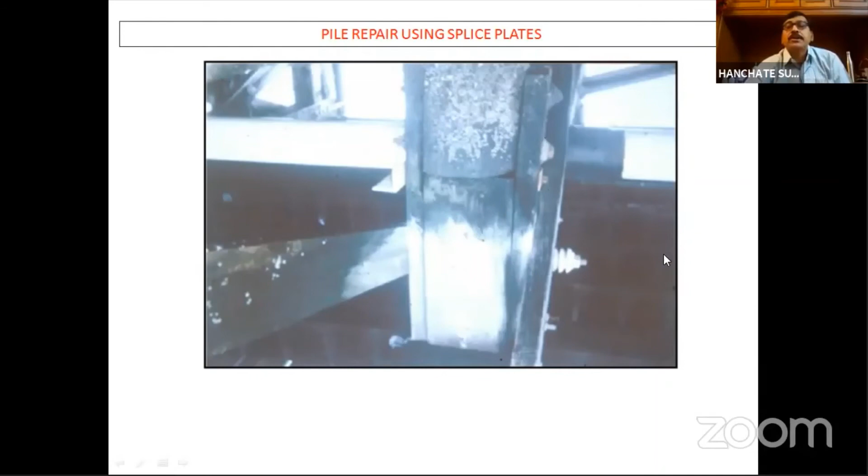Two splice plates are used here to repair the damaged pile, because the damage is very high. When the damage is very high, there is a need to improve the carrying capacity of the structure, so the splice plates are used for this purpose.

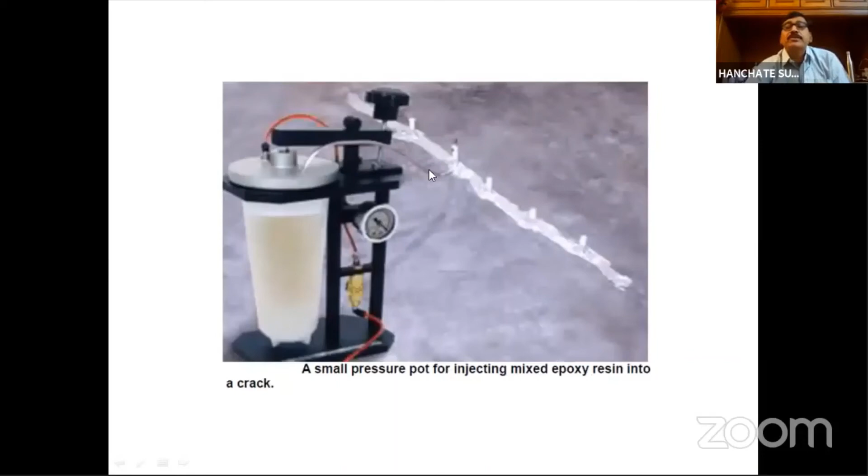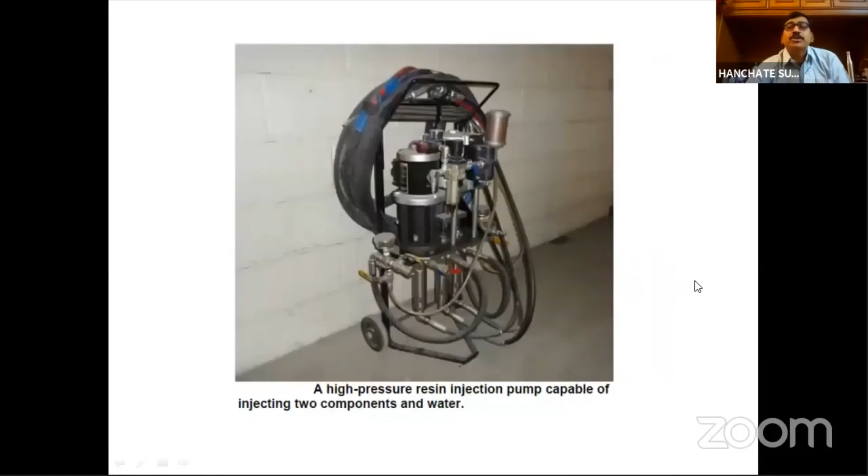These are the equipment for injecting epoxy mixes or resin into the crack. This is a typical crack injection where the epoxy is being injected. These are some resin injection equipment, all epoxy injection systems, which I'll just rush through.

After the repair is completed, it's very important to conduct inspection of the repairs also. Unlike above-water conditions, where you might forget about the repair, this is not the case underwater. When you complete a repair underwater, you have to inspect the repair after completing it, which is a very important task.

A scuba diver or a remotely operated vehicle needs to be used for this purpose, and the different inspection techniques already discussed are to be used for post-construction inspection.

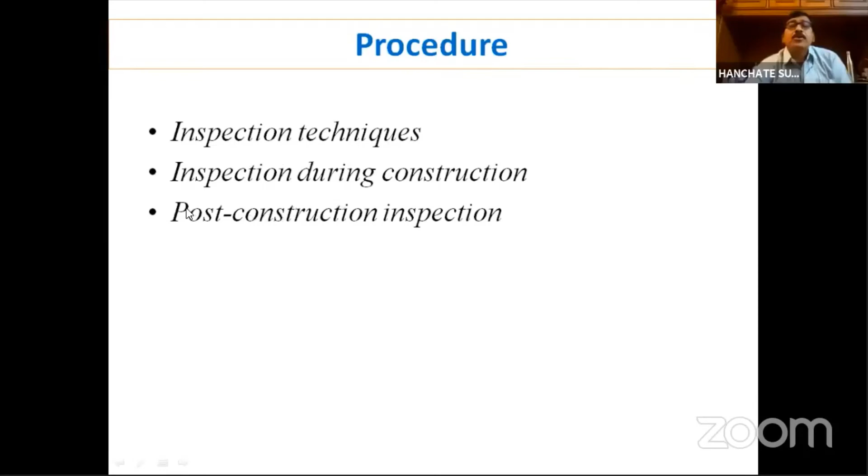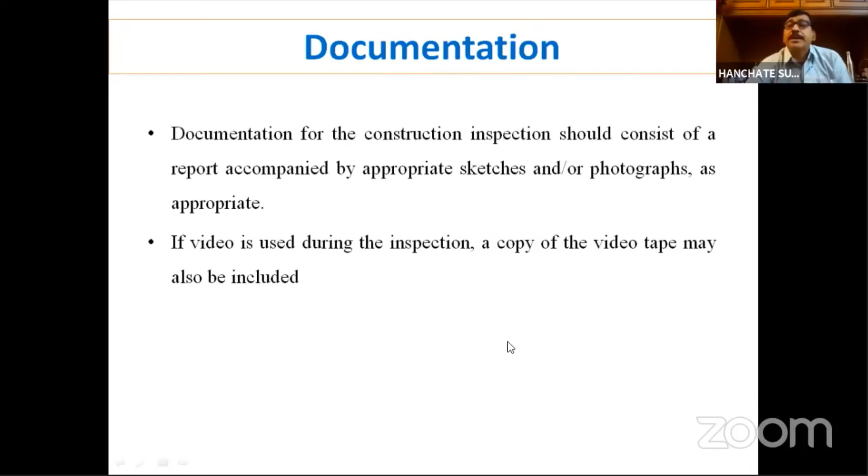Proper documentation, as already discussed about the complete repair, a video recording or videotape of the repair undertaken, and photographs and sketches, need to be kept for future guidance when doing underwater repairs. Now, finally, the developing technologies.

We observe precast concrete elements and prefabricated steel elements coming up for repairs to benefit underwater repairs. With these, there is nothing to do after going into the water, because if you want to inject epoxy or place pre-placed aggregate concrete underwater, you need formwork and have to do the concreting or injecting underwater, which becomes difficult. But with precast concrete elements and prefabricated steel elements, this can be avoided.

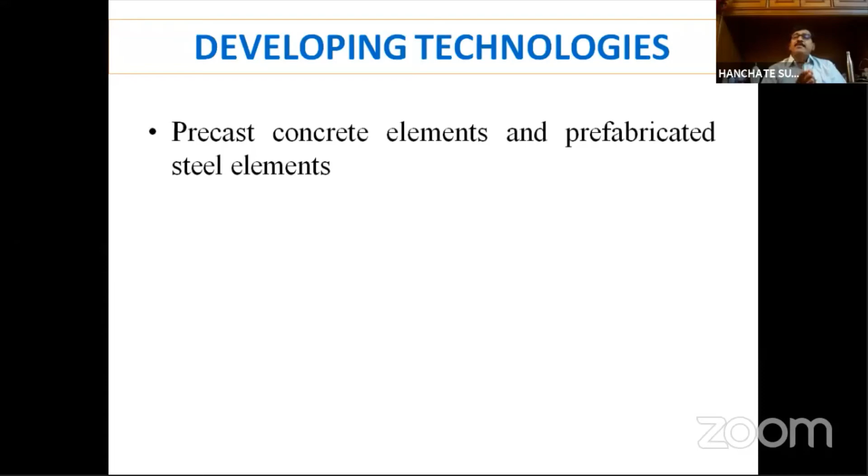Once the type of damage is identified and the type of element needed to improve the structural capacity of the damaged structure is determined, we can plan a precast element to be taken directly into the water, and the structure can be repaired with the precast concrete and steel elements.

Ferrocement is one such area. Most of you know about ferrocement, which uses mesh layers, welded meshes, with grouted cement sand solution. This is called ferrocement technology, which is also very useful for underwater repair, and this technology is also coming up for underwater repairs.

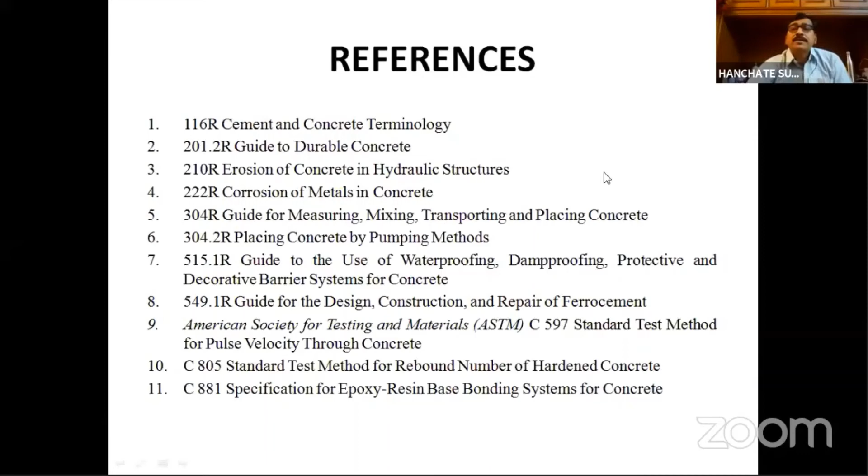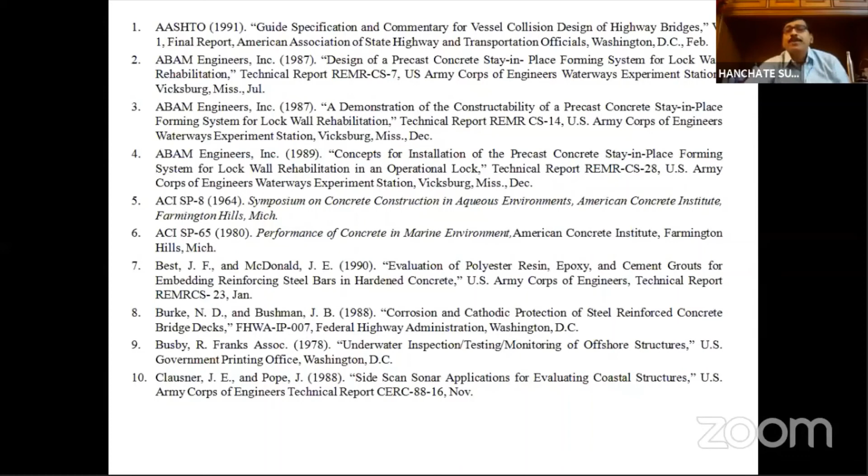That's about the various challenges and methodologies to consider for underwater concrete repair. I hope I made it very clear, giving a brief outline of how to tackle an underwater repair, and how challenging a task it is for a structural engineer to handle underwater concrete or steel element repair. I hope you enjoyed this presentation.